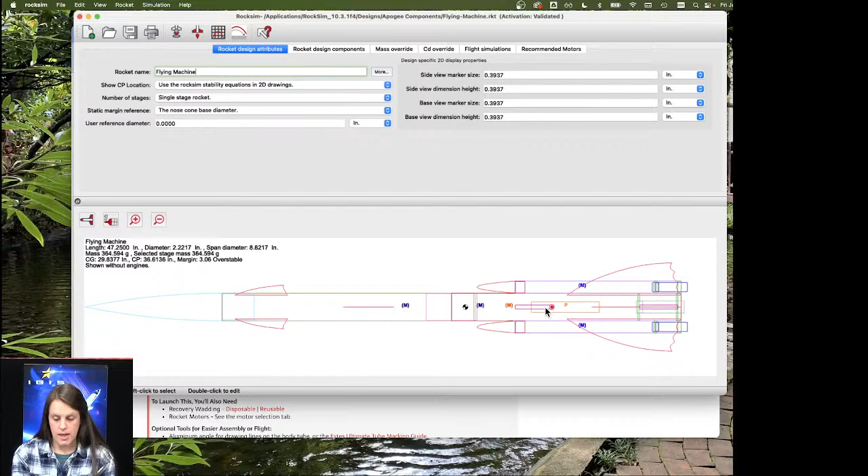So you can go into your RockSim, and all the existing files, assuming you didn't modify them, are in your applications or programs folder, then RockSim 10, designs, and then they're grouped by manufacturer, and then Flying Machine. So I pulled up this rocket and you can see it's got the tubes here with the nose cones on it. So you can go to the design components and look at how this is put together. So in the future, you don't necessarily need to reinvent the wheel.

You can find something. I do this a lot with things that I don't use very often. Like I don't do pods very often. So I went and watched the video tutorial on how to do that. Or I would pull up a rocket like this and go, how do we do this again? How do I do dual deployment in a rocket again in RockSim? Because I don't always do those things as often. And even though I know how to do it, sometimes you forget one key little step. So that's one trick there.

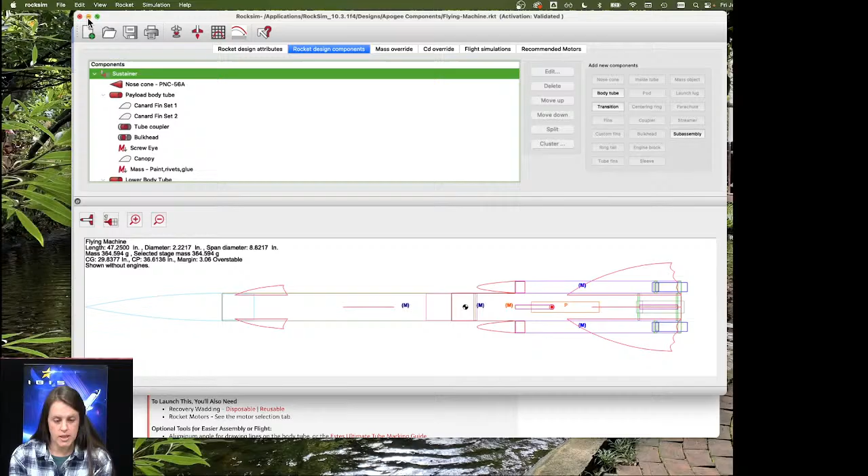The other thing I will show you real quick is we actually have a video tutorial on how to do this. So that's under How To and Guides, software, and then the RockSim video tutorials here. These are pre-recorded. They're from,

my trusty assistant is bringing me a rocket. This is the Airmail. This is the last kit that Apogee has released. Put that in front of my beverage.

So we have our RockSim video tutorials here, sorry, I lost my train of thought there for a second. These are all pre-recorded tutorials on how to use RockSim. The first ones are re-recorded for version 10. Tim is slowly making his way through these to re-record them, but the content is the same for 9 and 10, so if it references version 9, it's fine, works for version 10 too.

So quick video tutorial number 15, make strap-on booster pods. It'll show you exactly what I'm going to show you today. I actually watched this earlier just to refresh my brain in case I forgot anything there. And these are all on YouTube, so you can pull them up there or here.

There's also attaching fins on fins. So if you want to do a T-fin, you use the pods feature for that too. And then if you want to do advanced pod design, which in that video is putting a pod, like a strap-on booster pod, on a T-fin, getting super crazy. And the simulated jet engines, kind of the same idea for that. So these are also just about these topics, so you can come here and watch those.

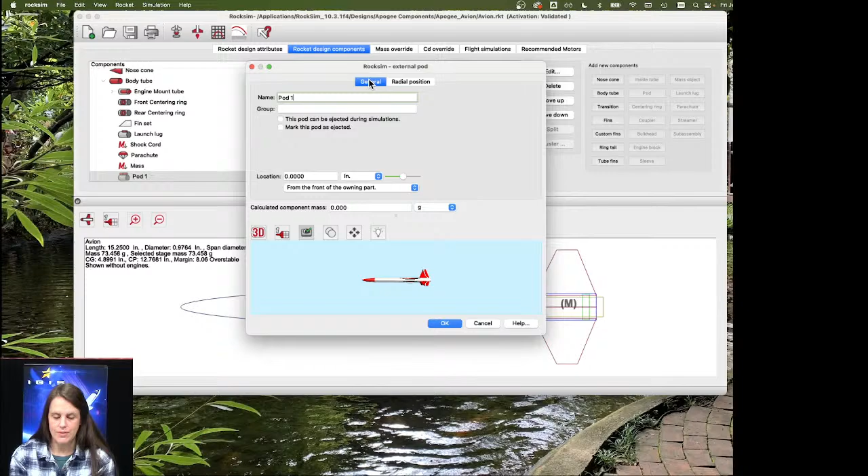So we're just going to add the pod, and same thing with radial position. That's the position around the rocket. For right now, we'll just leave it. So we've made our invisible pod here. So now we actually have to put the parts that we're going to make the pod for.

So in this case, the tube. So we're going to add a body tube. So again, we're not using the tube fins. And oh no, my database is missing. Why is my database missing?

I was playing with this because we were doing some tech support for it. So we're going to do this the old-fashioned way. And sorry, I've got a tickle in my throat. You can choose from the database. I'm pretty sure I deleted mine out to test, and that's why they're missing.

So you'll set the outer diameter of the tube. So this is a 24 millimeter mount, so I wouldn't want these to be too big. So we'll just say that, and then set that, and the length, that's probably a little short. So you can see kind of down here, it's a little small,

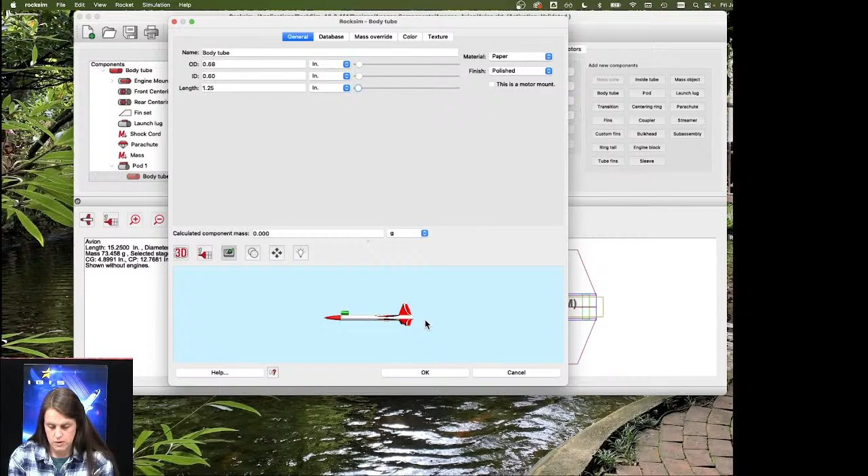but I have my little baby tube fin looking piece, and it is green there. So let's make this a little longer. It's a little short. There, that looks better. Okay. So we added the body tube there.

And now we can go back to the pod and that location. Let's do this way. It's kind of hard to see this way. So the location, we're going to move it back because we want it to be in the back there. So we just moved it back further.

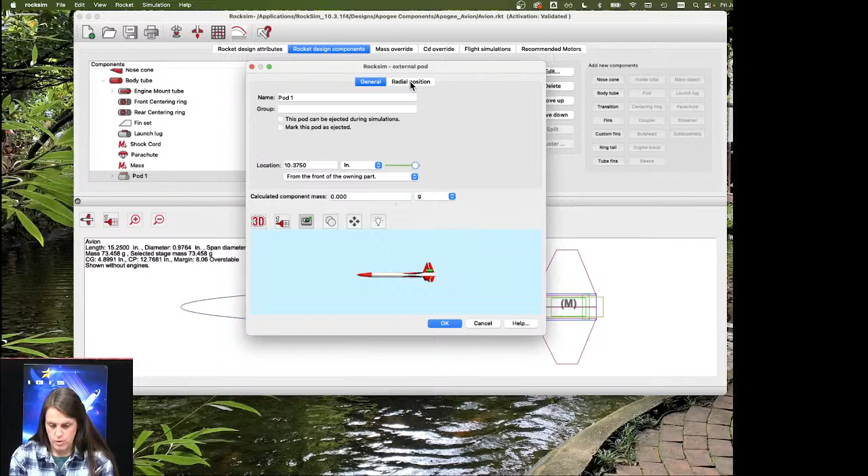And then for the radial position, I'm going to change this to a base view. So right now the tube and the fin are in the exact same spot, which doesn't work. So we're going to rotate it so that it is in between the two fins. There. Click OK. So you can kind of see it there. I don't know if it's kind of in between the tubes there.

So we've added our body tube, and then oh, I forgot. You're supposed to add the nose cone first. So we'll add the nose cone. It needs to go above the body tube. I was thinking tube fins, so I didn't think about the nose cone going first. Yes, yes, yes. I have no nose cones. Okay, so change my view there.

And zoom in so we can see what we're doing. So the length of the nose cone, the diameter, I think that's what I put my tube fin diameter as, and then the base length, that's just if it's like conical and then has kind of a flat section there.

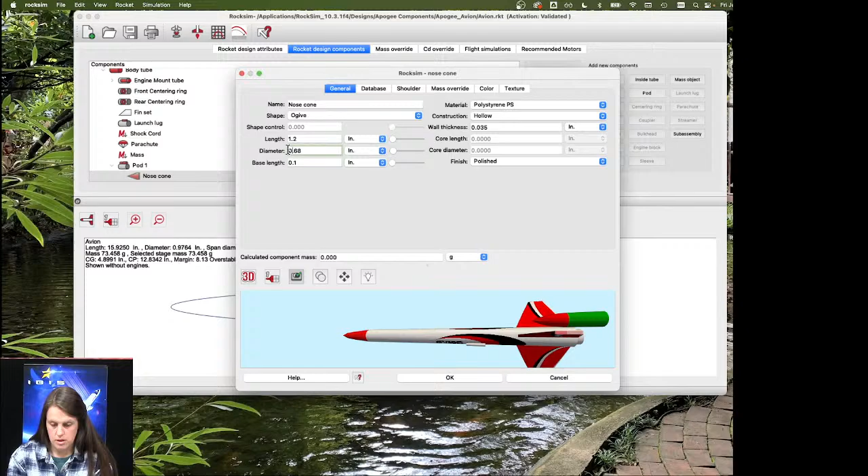Let's change the shape so it's a little bit more there. You can see there I've got my little nose cone on my body tube. And then we don't want it to be solid, that would be really heavy. Put a wall thickness for there. So if you choose from the database, you don't have to do all that stuff, but since I'm doing this manually, we'll click OK.

Ooh, I'm really zoomed in now. So you can see I've got my nose cone and my body tube for my pod. And this is all there. And then if you want, you can play with the location because it's a little far back now. And then if you wanted to, well, you would need fins of some sort because this won't function as a fin anymore.

But you could add a streamer inside of it. If you wanted to make this a one that pops out, you can add an inside tube in the body. So once you've set your pod from here down, it's just like another rocket. You got a nose cone, body tube, you can put fins, you can put an inside tube in to put a motor in it, if you've got a rocket with a central motor and then 2 outside motors. So you can do all of those things. So that's how that would work there.

Just checking time to make sure.

So Jerry, hopefully that answers your question. I didn't go through, you know, every single option of what you can do with this. The video tutorial I showed you beforehand goes through putting a streamer in there, putting a motor in there, having the pod pop off. But that's how it works, as pods is what it's called. So you're gonna have a strap-on booster pod of some sort.

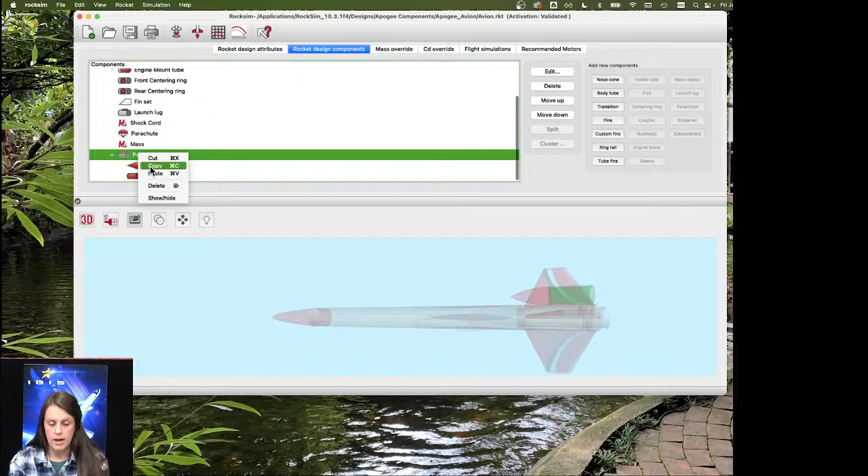A pod, even if it doesn't function as a booster, even if it's just like a fake missile or something and it's glued on, you just start with the pod, your invisible glue, and then add your nose cone, your body tube, your fins, whatever you want to put on there. And the other thing is, say I wanted to add one on the other side, you can highlight your pod, right click, and copy, and then go back up to your body tube and paste.

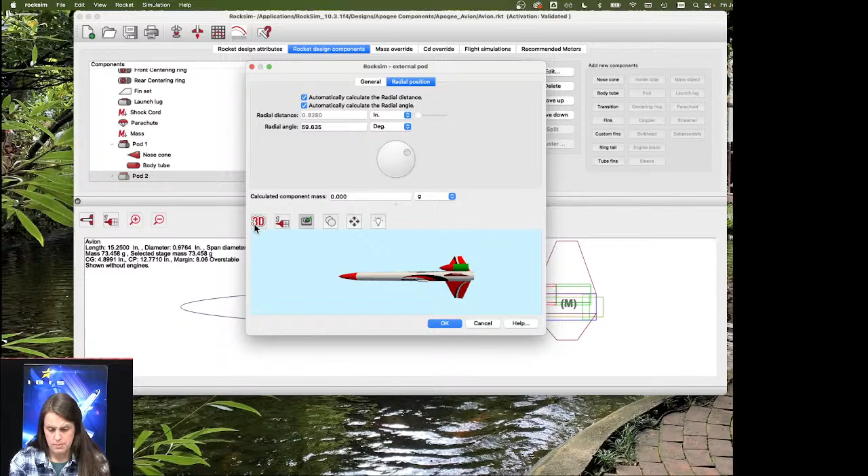And so now I have pod 1 and then the duplicate of pod 1. So this will be pod 2. And right now they're going to be in the exact same spot, so you won't be able to see both of them. But if we change the radial angle here, now you can see there's 2 of them, and you can see in this now, I'm zooming, 2 of them on there.

So once you have your pods all set up, you can copy paste to add more. So you could do 2 or 3 or whatever. You can put some more up front or more in back. But yeah, that's how that works, Jerry. So hopefully that answered your question. If you have any more questions, just throw it in the chat or send us another email. But that's how that works for that.

So the next question we had, which is kind of related, so I'll take this one. There was a customer who emailed us, and his rocket wouldn't fly, and he couldn't figure out why. And I think it was this guy. Yeah. So he would load an engine in here. I don't have engines either. Okay, I'm gonna have to find my engines real quick. One second here. Okay. Yeah, I pulled the data folder out.

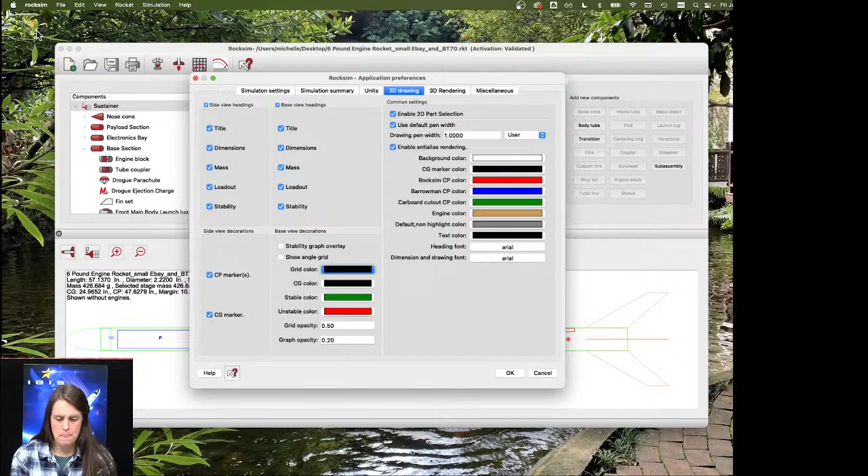So to reset your location, to factory reset RockSim, you just go to Preferences, Miscellaneous, and see, it's looking for a desktop folder that doesn't exist because I changed it. And you just click Factory Reset and click OK, and then RockSim will restart, because any changes to the database, it only recognizes them when it first boots up. So if you open RockSim, make a change, drag the files in, it won't show up till the next time you restart. So now I should have my files. So let's reopen that rocket.

This guy. And then choose an engine. Yay, I have engines. So when in doubt, factory reset. That'll reset all your units and things too, so just be aware. But that's fine, you can fix those real quickly.

So we're gonna choose an engine here with a delay. Okay, launch. Oh, and of course this is gonna work for me just fine. He was having problems like this where it wouldn't launch. If you see the little rocket on the pad with a little X, basically it means it never left the pad. He said he left it running all night and it just kept kind of running.

The reason that can happen, sometimes there are pods or sub-assemblies that can cause issues. So this is a sub-assembly here. You can make a sub-assembly to, say you make a motor mount that you want to use in multiple rockets. So it's got your two centering rings, your motor mount tube, maybe an engine block, maybe a retainer or an engine hook. You could make a sub-assembly so that's all one piece. So that next time you do a rocket, you can just throw that sub-assembly in.

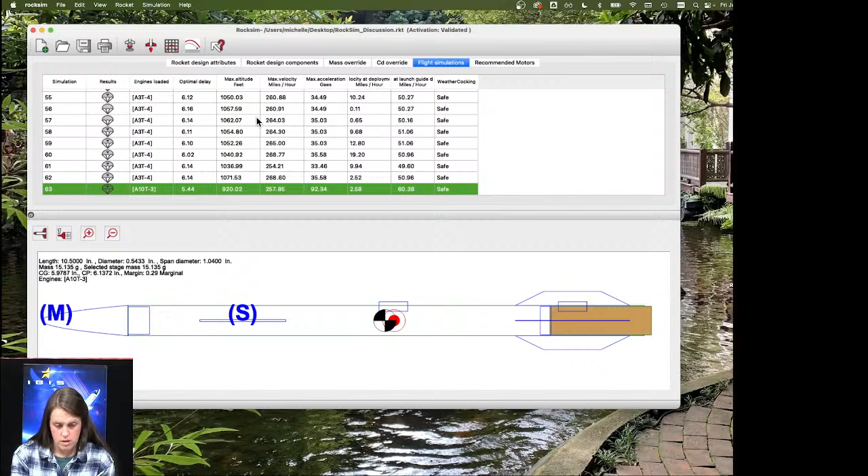And the thing you can see, whoops, I haven't played with this in a while. So we're actually going to show here when you run the simulation the weathercocking cone. This is where it's safe. So as long as it stays in here, this is what Mark was talking about, showing it safe. It's staying in this cone. So let me show you what happens if we...

So I deleted the nose weight. So you'll notice now the margin is -2. It's unstable. Our CG is behind our CP. So this is not safe. You don't want to fly this rocket. But let's see what happens here. See, so now it says unsafe. I'm going kind of fast, sorry if I'm clicking through here.

So now when we launch it, see what, whoa! Hopefully you can see what that just did. Let me slow it down. This is the fun stuff to do in RockSim. This rocket is doing cartwheels. This is what unstable means. So this rocket, it'd be cool to see, but it is not safe to fly this. That's the difference between unstable and overstable right there.

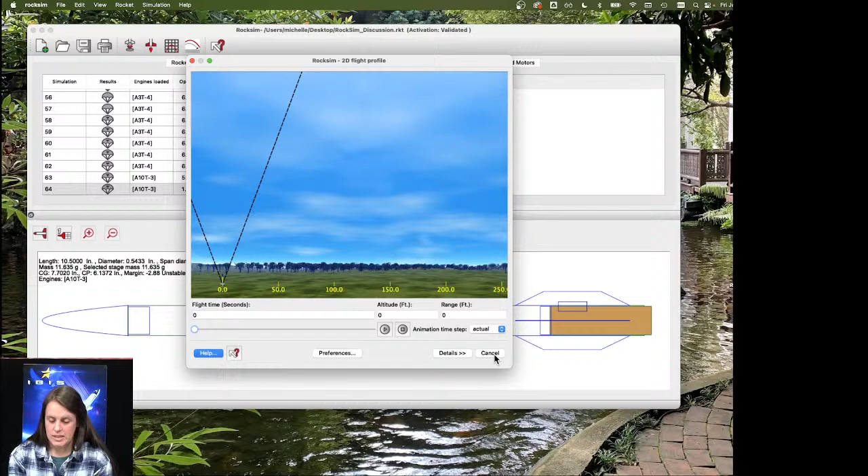So there's that. Mark's question was, is there a place where your CP should be? Because his CP is pretty far up. It's like halfway up the rocket. And so he was wondering whether or not that is safe, or if there's a place your CP should be on rockets. This rocket has really tiny fins on it. And so that can be a problem for stability, which it is, which is why he has to add so much nose weight to it to make it stable.

And the answer is no. The CP is wherever the CP is. If your rocket's unstable, you can make the fins a little bigger. You can add nose weight. You can make the rocket a little longer. Those things all move the CP or the CG. What matters is that margin that we were talking about. The distance between your center of gravity and your center of pressure needs to be at least 1 body tube width. Where the center of pressure is doesn't matter.

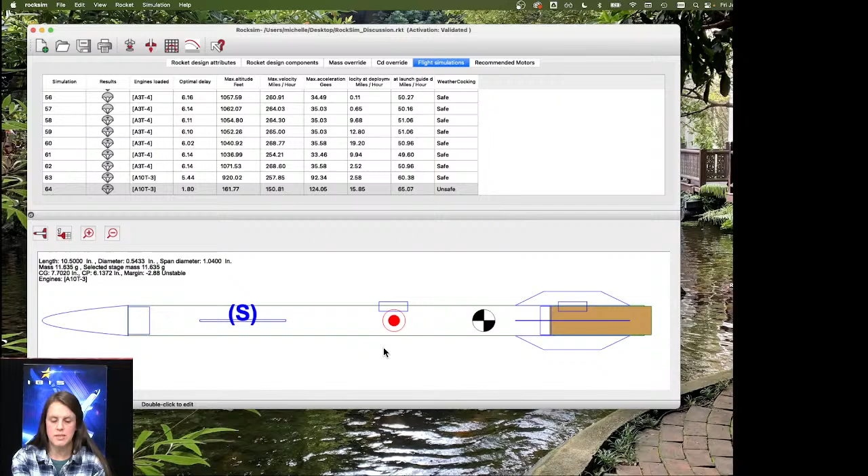If it ends up being towards the front of the rocket, as long as your center of gravity is a whole body tube or more further forward, then it should work. It's more common to be more in the back half of the rocket, definitely, because what happens is, I don't know how much nose weight was in here. Let's reload this rocket. So let's look here. He's got 3.5 grams of nose weight in this tiny little rocket.

There's a point at which your nose weight is going to be way too heavy for such a tiny little rocket. So that's where you get into that discussion about your center of pressure. It's not that it needs to be in a certain place. It's just that what you have to do to get your center of gravity forward of it is going to get to a point where it's ridiculous, where it's just not going to work. You're going to have a bowling ball inside of a tiny little rocket. You're not going to be able to get enough weight into it.

And that's when you start going, okay, maybe if I make the fins just a smidge bigger, and we've done that for some of our rockets that we sell or plans that we've done. We've come up with a great idea, or we've got a scale rocket that's exactly to scale, and then we go to fly it and it's unstable and it goes willy-nilly. So sometimes you have to cheat and make the fins just a smidge bigger, or the tube a little bit longer, so that it'll fly stably. If it was a display model, you can get away with whatever you wanted to, but if you want to fly it, you have to make it stable somehow.

Yeah. So Mark, hopefully that answered your question. I don't think it's the answer you wanted, because in your email you really wanted there to be a kind of a right answer. He was confused why his rocket wasn't going unstable. My rocket keeps saying it's safe to fly, and it's just funny because usually it's the other way around. The questions we get, they're like, "Oh, RockSim keeps saying it's unsafe, but I've flown it, it's fine." And he just kept trying.

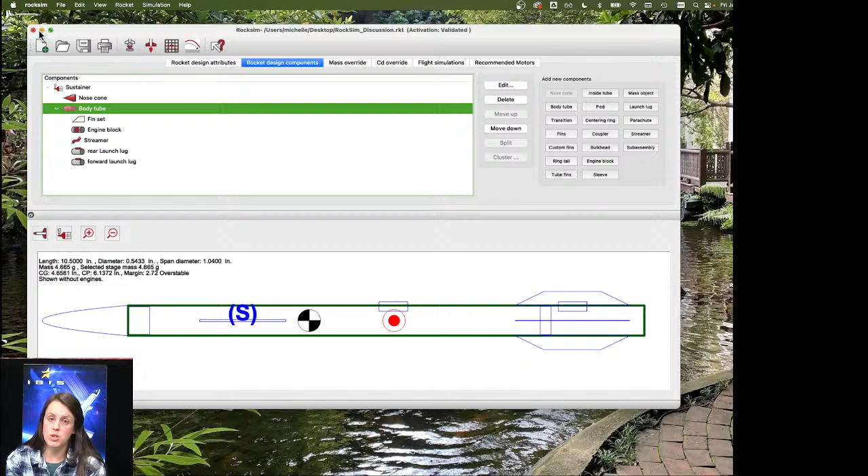Okay, Boku says, is that software Java based too? Right now it's a desktop program. And I'm not a programmer, so I don't know exactly what all is involved. We are working towards a cloud-based version of RockSim, but we are not close to that anytime soon. The way RockSim was built many years ago, it doesn't translate directly to the cloud. You can't just take the code and throw it in the cloud and it works. It has to be rebuilt from scratch, basically, and we're working towards that slowly, but it's not going to be real soon.

What we do have in the meantime is Tim's favorite thing ever right now, which is the launch visualizer, the simulation portion of RockSim. So you have to design your rocket in RockSim, but once you have it designed, you can go to the launch visualizer and launch it in 3D. This is all cloud-based, there's nothing on your computer. And you can go there now. It's in beta testing right now, so once we are ready to go live, we'll wipe it and start over. But you can sign up now for a free account, or you can play with it without even having an account if you go to rocksim.com.

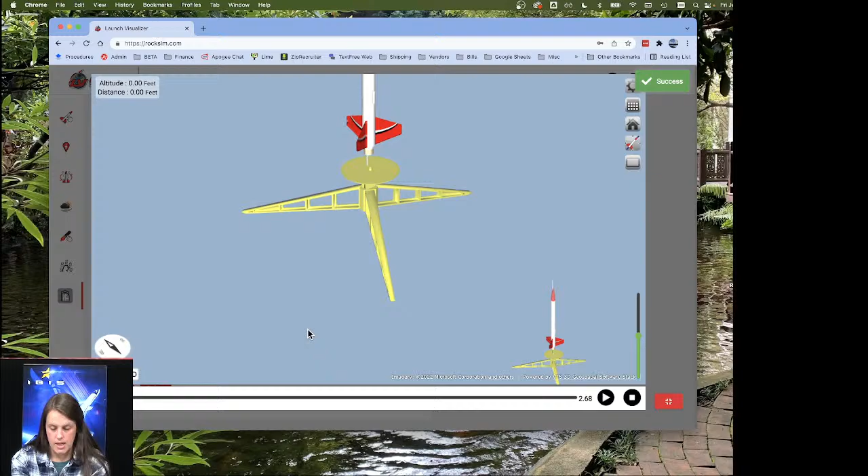And then it will run a simulation, and hopefully this works okay. And so there's my rocket on the pad. And then I launch it. And it's stopping at apogee because this is the unsigned-in version. That's where it stops. But you could sign in here.

You can see this is the launch field that we launch at in Pueblo. That's about an hour away. So you can play with that. And then you click here to get out of that.

So there is that, but we do realize that RockSim needs to be updated, but it's just not as easy, and we're not a software company. That's something that I think people don't realize. Right now I think we have 10 employees total, and 99.9% of us aren't programmers. We're in the hobby business. So we have people working on it, but we don't have 100 programmers or 1,000 programmers working on it like Amazon or Microsoft. So just bear with us, please, for that.

And Mark says he reran the simulation and removed the nose weight. Yep. Johannes says glue, large paint area and filler in the fins. I always check the real center of gravity because your weights can be off. That's also smart, Johannes. So in RockSim, you have your rocket and it's going to say where your center of pressure is, where your center of gravity is. But then what you need to do is take your actual rocket and figure out where the center of gravity is. And that can be as simple as just balancing on your finger.